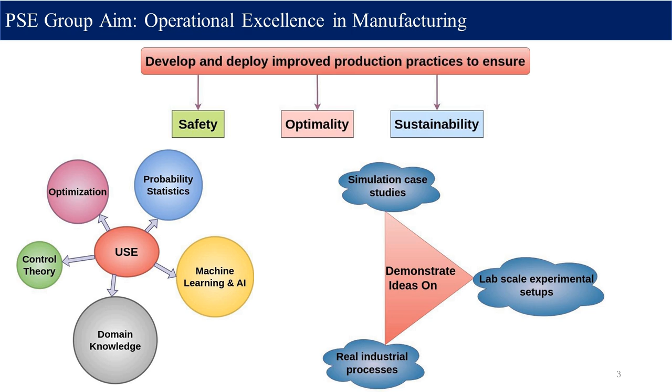And we demonstrate our ideas using simulation examples, using lab scale experimental setups, or also wherever possible on real industrial processes. So, PSE group activities - we look at industrial applications, plant-wide dynamical systems, how they operate, we model them, look at their performance. Methods and algorithms - we look at both linear, nonlinear processes, fast optimization, computations, real-time operations.

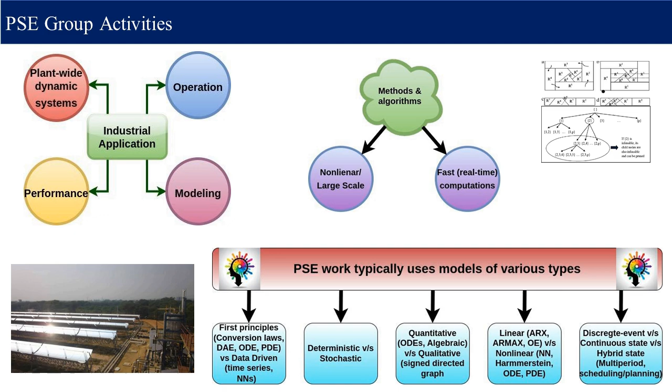And for that, we use models of various types - I'll have probably a bit more to say in the next couple of slides. If you look at the methods and algorithms, these are some of the techniques where we have the expertise - the toolkit that we have, all geared towards process design and operations: control relevant modeling, optimal sensor network design, simulators, process control, advanced process control, optimization, state estimation methods, and the like. Now, of course, AI/ML is there in all these approaches - it's integrated, we really don't see any difference as such.

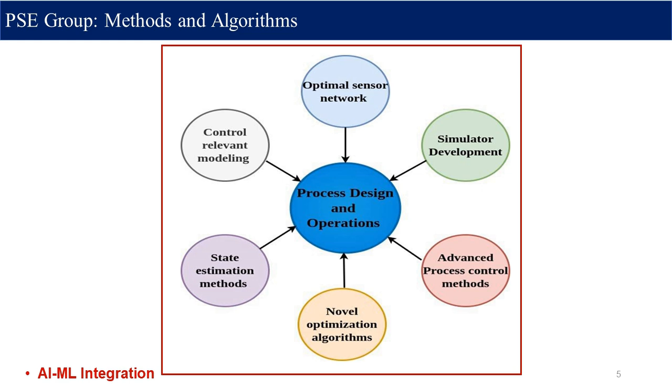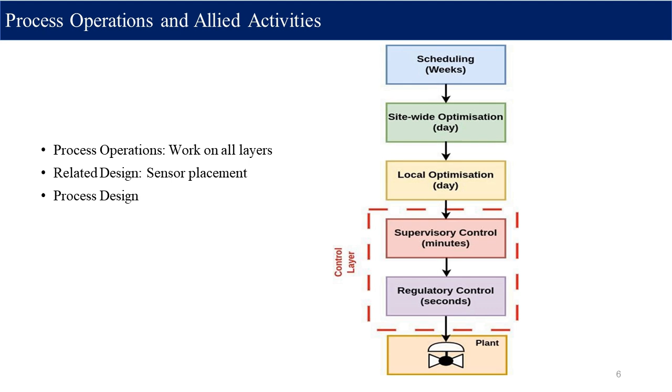As far as process operations is concerned, this is a typical hierarchy of operations, you can say. At the lowest level, you have the plant, where you have your actuators, and you have regulatory control, supervisory control, optimization, site-wide optimization, and so on. So, we work at all these layers in operation, and also some related design activities. If I have to operate well, I need to measure the right set of variables, so we look at some of those areas as well. So, both process operation and related design activities, as well as process design, is what we look at.

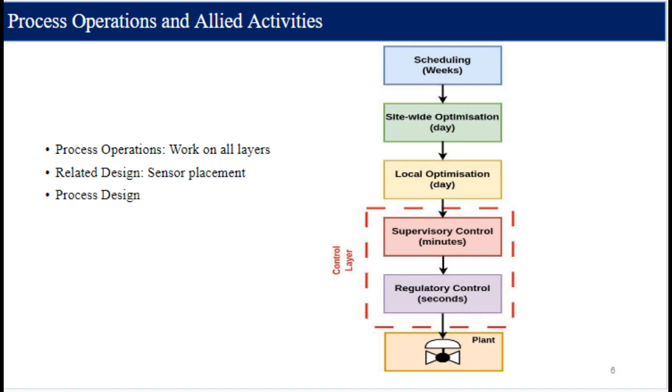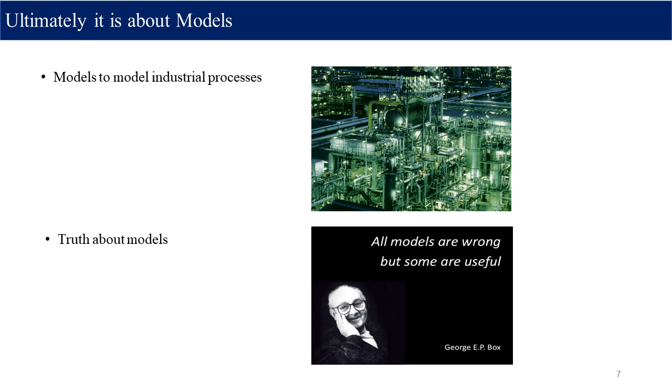Now, ultimately, any activity you do - this digital transformation or any other activity - ultimately it's about modeling, right? So a lot of effort in any such activity goes into developing models. We work with different types of models, and there is a saying in statistics - George Box is a famous statistician, he had said: all models are wrong, but some are useful. That is what we also believe in. Depending on the application, you choose the right model at the right level of detail or granularity. It's never going to be a perfect model, but it should be appropriate for your application.

So, digitalization for us, the theme of today's workshop, essentially means that you develop - now this is the term people use - a digital twin. I don't know what - in the previous slide I said a model cannot be perfect, but people say it's a digital twin, so let's use this terminology. There's a kid looking at the mirror and seeing his reflection. We know that in a digital twin, really you cannot have a perfect capture of reality under all operating conditions, but for certain conditions maybe you can do that - a physics-based model.

So for us, digitalization means you develop these digital twins using a variety of modeling paradigms. You could have first-principles physics-based models, data-driven models, or what we call a gray box model - some combination. Use the right model, and then use the developed and validated models for design, training, and real-time operational activities - a bunch of activities I talked about. A key aspect, some of the tools that we look at, for example, state estimation, parameter estimation, adaptive control, fault tolerant control.

There is a big challenge in using these models as to how to maintain them. You develop a model now, two months down the line it doesn't work, it doesn't mimic your process. You have to continuously update your model.

So we have a lot of research going in that area of adapting your models and your control methods. In the next few slides I'll give you a glimpse of some activities and applications, either on experimental setups or maybe simulation or industrial setups, where different types of models have been used. These are dynamic, or what you can say is physics-based models, first principles based models.

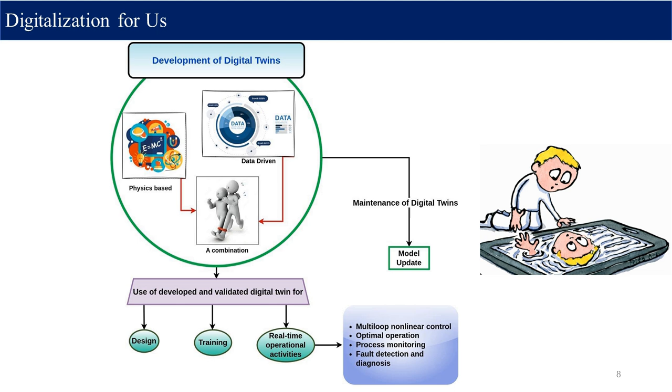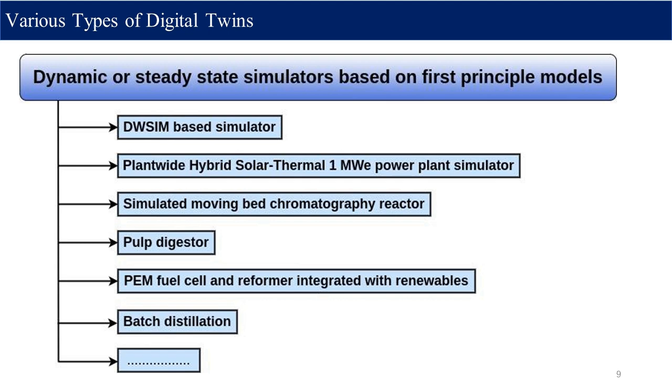These are just some representative applications. This is a DWSIM based simulator development activity going on in our department, an open source dynamic simulation exercise. Professor Kannan is leading that. It has been tried on various processes, it's modular in nature, and it's also being customized for refinery, with a person leading it from the industry side. This is another illustration of a first principles dynamic model.

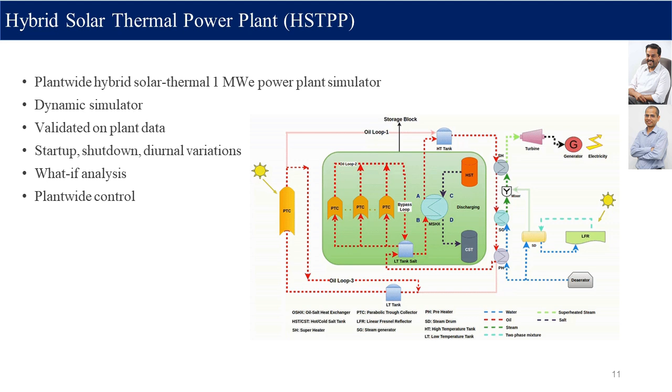Professor Sharad and I worked on this, and we are still working on it. This is a plant-wide dynamic model developed for a hybrid solar thermal one megawatt electrical power plant. It's a dynamic simulator validated on plant data. What you see here is daytime operations. Now you can actually simulate startup, shutdown, diurnal variations, do a lot of what-if analysis on different operating strategies.

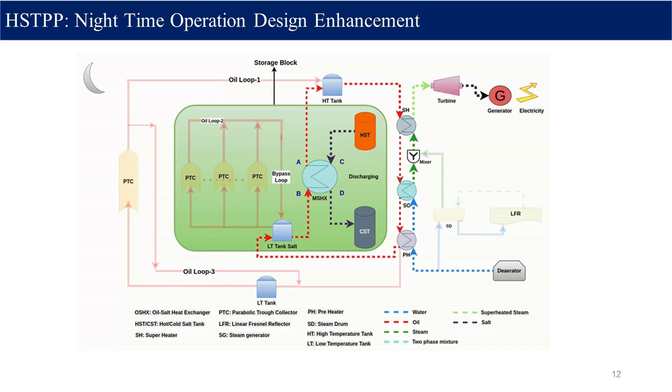Design ideas, you can try out plant-wide control analysis. The original plant did not have nighttime operation capabilities, so there are proposed designs to enhance that capability. Now with the simulator you can do all these exercises. Using some additional salt storage, you can operate the plant at night.

This is another activity by Professor Gudi and Professor Sharad, where some scheduling of renewables is being studied along with reformer integrated proton exchange membrane fuel cell and energy storage. They have a dynamic model of the fuel cell, and the energy generated has been integrated in a scheduling framework along with some other sources.

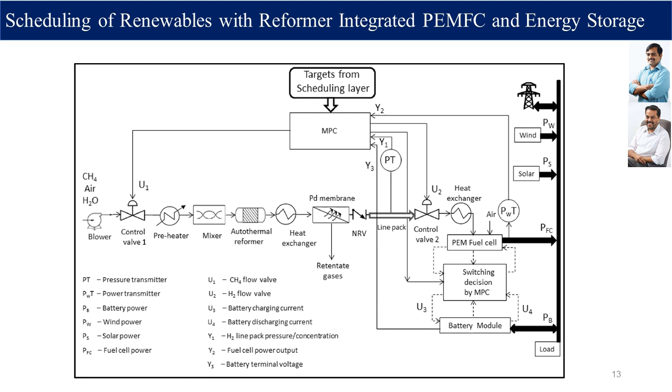Professor Sujit has an illustration of optimal operation in batch distillation. Again, dynamic models are developed for this, and you can now try to optimize some profit that you want to generate while meeting the product specifications, and come up with optimal operation.

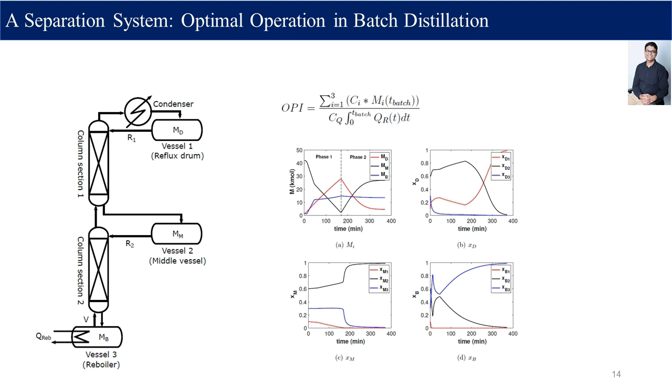So all these are, in some sense, in modeling terminology, first principles models that have been used in various approaches.

We also look at data driven models. Regression is a very widely used modeling technique in various forms. Time series analysis, a lot of expertise we have in looking at time series models. Decision trees, random forest, all these models which are available with machine learning, AI, and more principal component analysis based models, and so on.

A distinguishing common feature, compared to what I would say is other pure data scientists or somebody working purely in AI, is that we try to utilize as much prior knowledge as you have. So really the models are not completely black box. Whatever information you have about the process, that's really the strength.

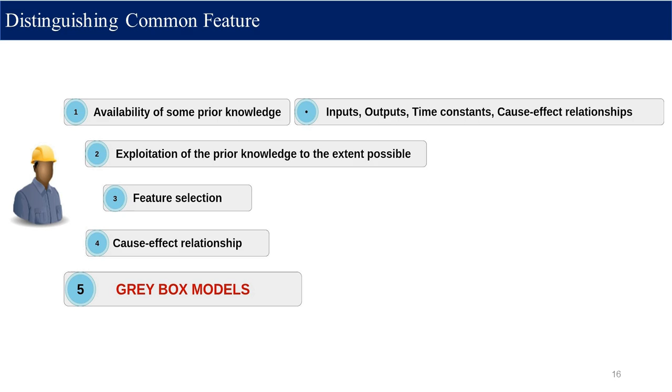Being in a domain, chemical engineering, mechanical engineering, you have some information, some knowledge about that. You exploit that prior knowledge to the extent possible, and you have the right set of variables which you use for modeling. So ultimately, what we work on is gray box models and not just pure black box models.

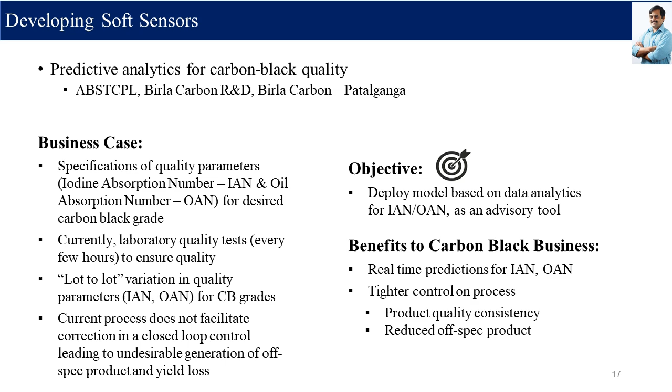These are now some examples of those gray box or machine learning motivated models on different applications. This is Professor Gudi's soft sensor, where you want to predict certain quality variables which are hard to measure, but important for your online control. There may be a talk in the afternoon, so I'll skip this, but this is some activity developed with a company.

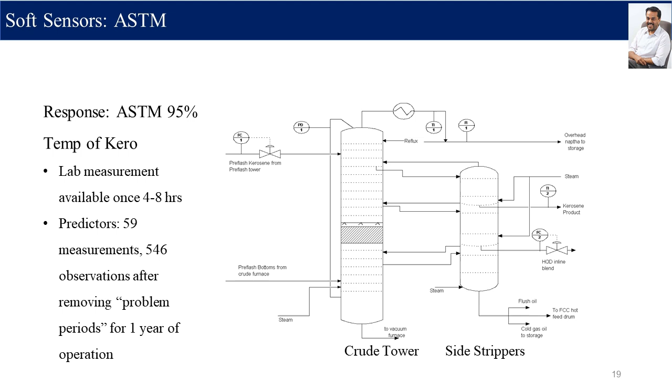This is Professor Sharad's another soft sensor approach to predict the ASTM 95% temperature of kerosene. Again, lab measurements are hard to come by, and they've built a neural network model, but the model exploited the first principles understanding. It was not a complete black box, it was like a two-stage neural network which finally worked, and this was implemented in a large refinery DCS.

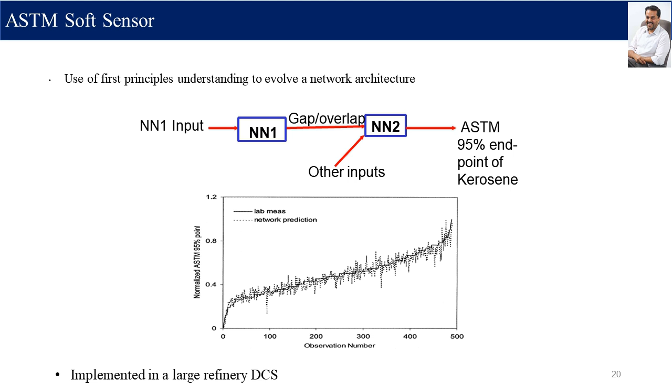This is another soft sensor activity. The idea of a soft sensor is you are trying to predict some variable which you are not measuring, building a software-based, computer-based sensor.

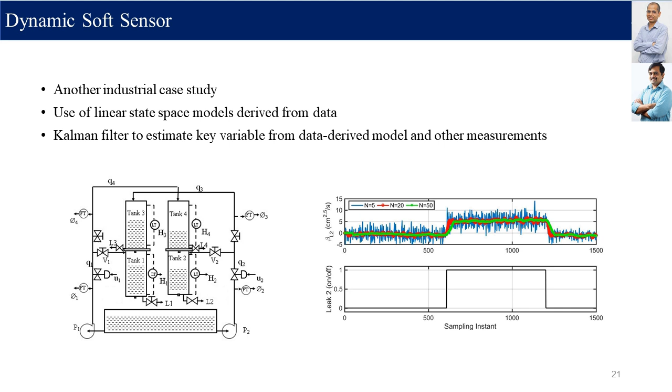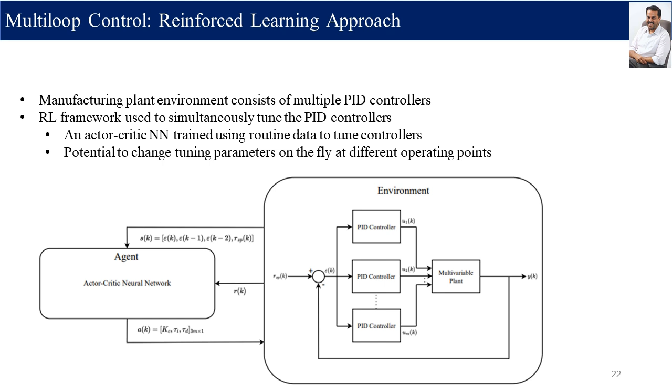This is some other ideas, using reinforcement learning. This is now what people call a model-free approach for tuning your controllers. So an implementation, a schematic of that.

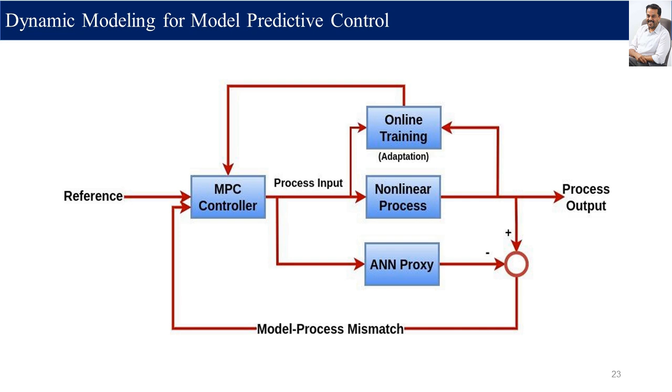We also have a lot of expertise in using dynamic models for model predictive control applied for nonlinear processes. Professor Sharad's one application used ANN models, artificial neural network models, for model predictive control on this dynamical system. This is actually a challenge problem in literature called the Tennessee Eastman problem.

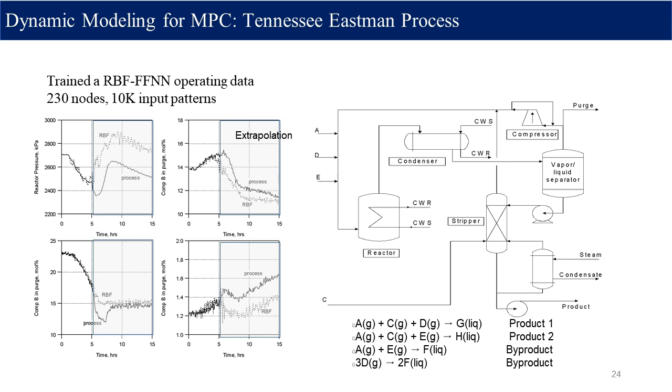Many times in our community, if you work on some research area and show it on this problem, it is considered the gold standard. On this problem, they trained a radial basis function feed-forward neural network, a machine learning model, and then applied model predictive control on it to control various variables.

Professor Sachin is also an expert in model predictive control. Some of his work addresses the challenge I mentioned in modeling systems: you can develop models, but you have to keep updating them. That's the biggest challenge. So Professor Sachin looks at schemes where, while you are controlling, you are also updating your model—dual adaptive schemes—so we meet the control objectives and update models as well.

He also looks at fault tolerant schemes, where if there is some abnormality which occurs in your process, you recognize that abnormality, update your models accordingly, and restructure your controllers.

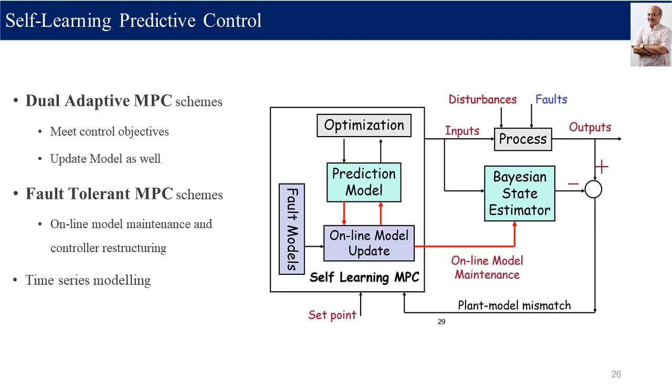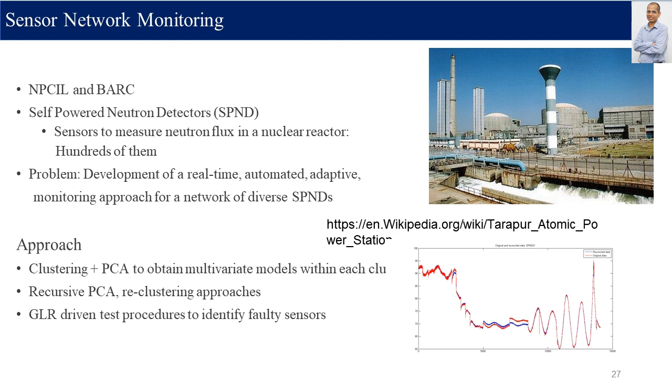We used some clustering and principal component analysis based models to develop models and then continuously update them using some recursive ideas over time. Using those models, you could build a system which could detect whether there is a problem with the sensor or not. The difference between the measured value and what your model predicts tells you that there is some issue with a particular sensor.

There's another exercise, again a data driven model using principal component analysis and slow feature analysis approaches, where another interesting area is prognosis—not just knowing that a failure has happened, but predicting that a failure is going to happen. In this simulation based case study, we could predict off-spec product well in advance, so that once something has happened, you know that later down the line you are going to get off-spec product, so you better take corrective action now.

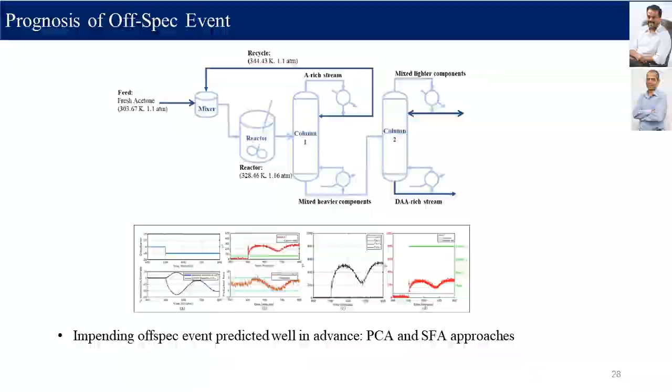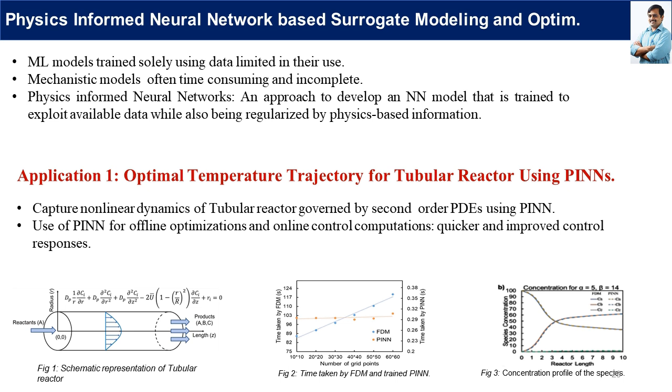Professor Goody's work is an illustration of what people are now calling physics informed neural networks, where while training a black box model, you try to take it in a direction where it also incorporates some first principles information. They have used this for a tubular reactor for optimal temperature trajectory.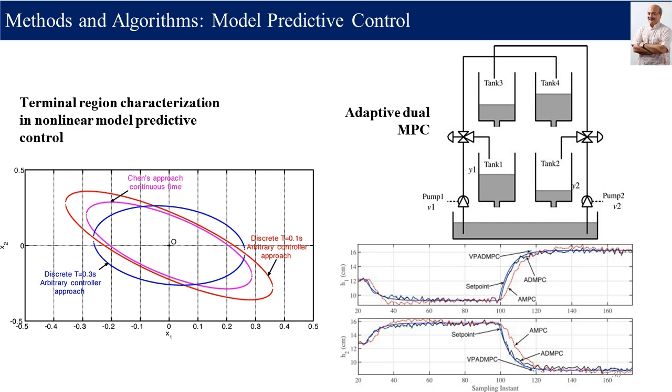Maybe I'll skip some of these slides. So these are some of the research areas that we do now. We work a lot on methods and algorithms in MPC. This is some scheme for fast optimization.

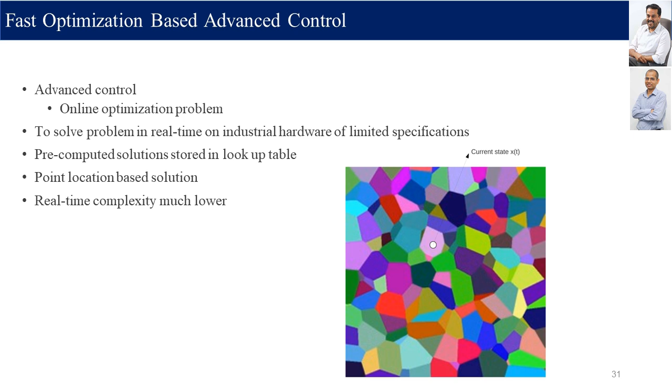When you deploy these advanced process control schemes, you don't have much capacity to do a lot of processing, so how do you do fast optimization? Professor Sujit looks at distributed control, again advanced control, so that you can scale it to larger processes.

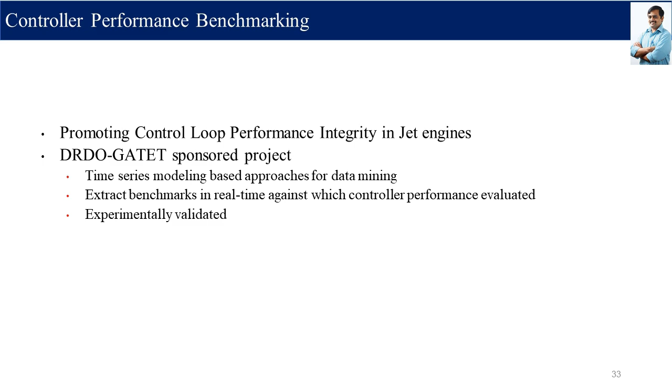Professor Goody also looks at control loop performance activities, applied to some real systems. Sensor placement is something I work on—this is an illustration, just a schematic, of optimal choice of variables in a water distribution network.

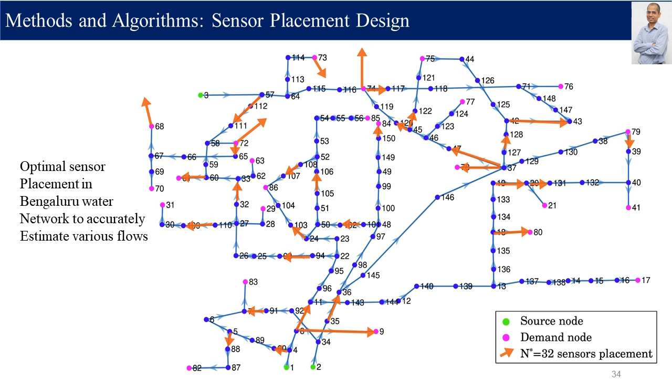Yeah, this is optimal, maybe I can skip this slide. Some recent activity we have started—whatever I presented so far was on process—this is on digitalization of documents.

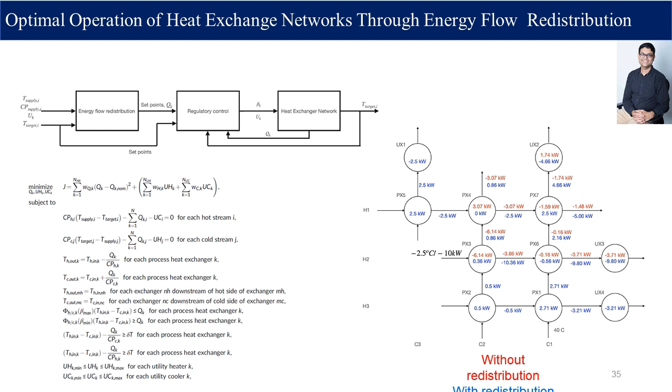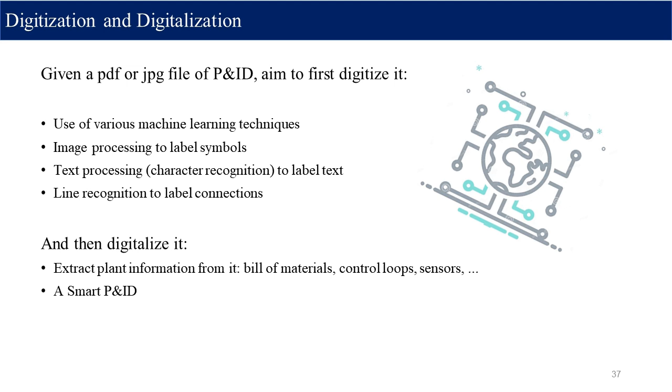You have a piping and instrumentation diagram, a hard copy or an image. You want to scan it, and not just scan it, you want to extract what information is there. You really digitize it, and once you have digitized it, you can process it—for example, how the various units are connected, how information flows, and so on. That gives you a smart P&ID.

To summarize, there are significant activities in various areas of process design and process operations in the group, at the unit level as well as the network or plant level. The group is strong in modeling, which is really the heart of digitalization. Ultimately, it's about what models you have, and for that we use various data analytics, control, and optimization tools. Thank you.